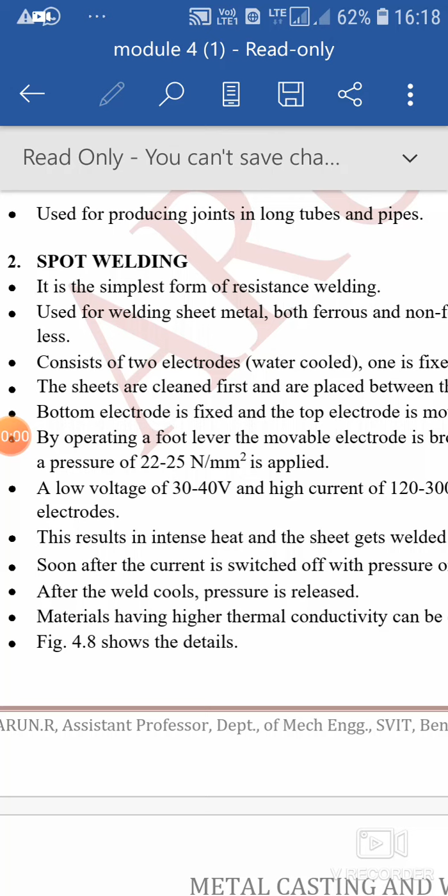Spot welding process is the simplest form of resistance welding used for welding sheet metals of both ferrous and non-ferrous metals of 8 mm thick or less.

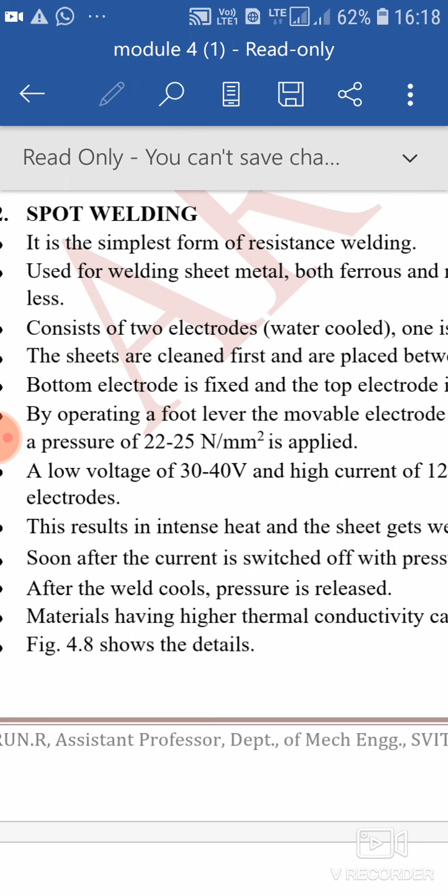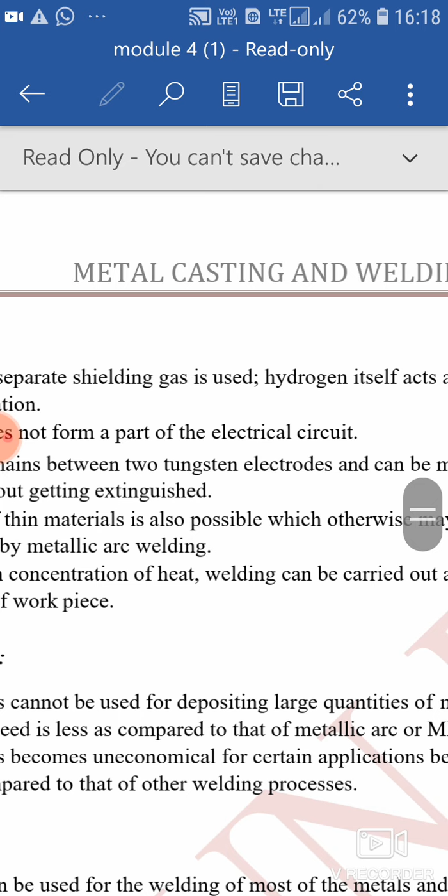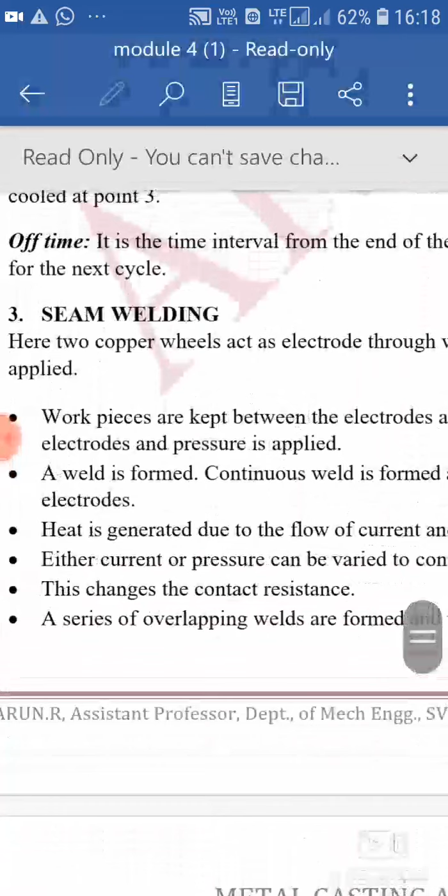It consists of two water-cooled electrodes, one fixed and one movable.

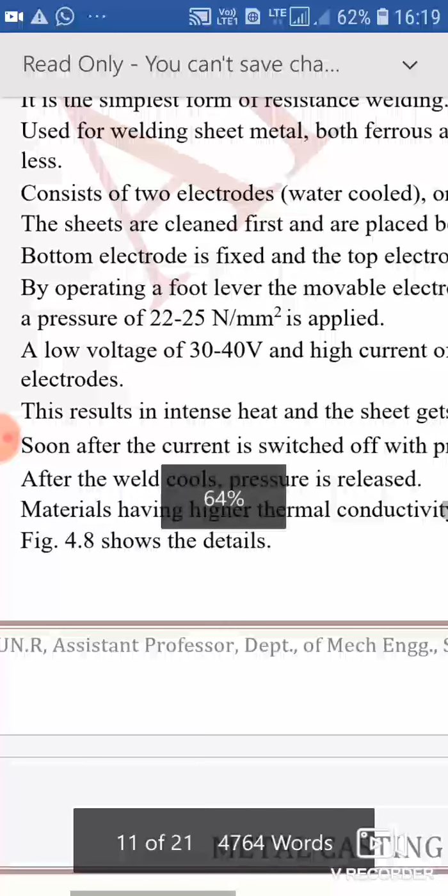By operating a foot lever, the movable electrode is brought in contact with the sheet and a pressure of 22 to 25 newtons per mm square is applied. A low voltage of 30 to 40 volts and high amperage current of 120 to 300 amperes is passed with the help of a transformer into the electrodes.

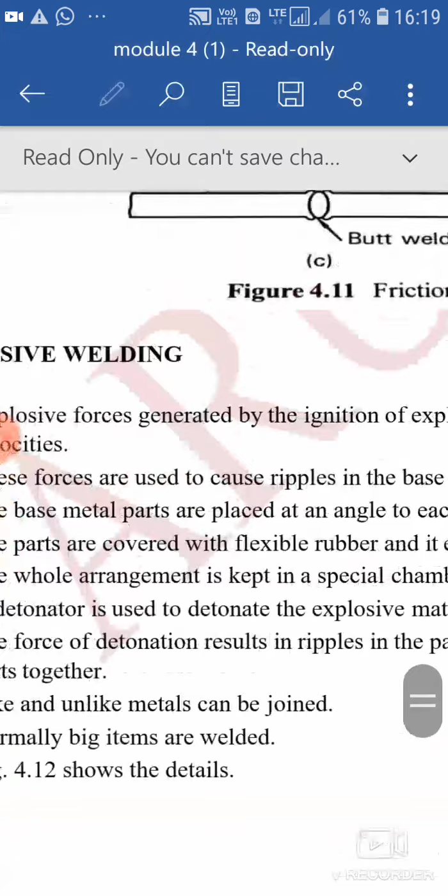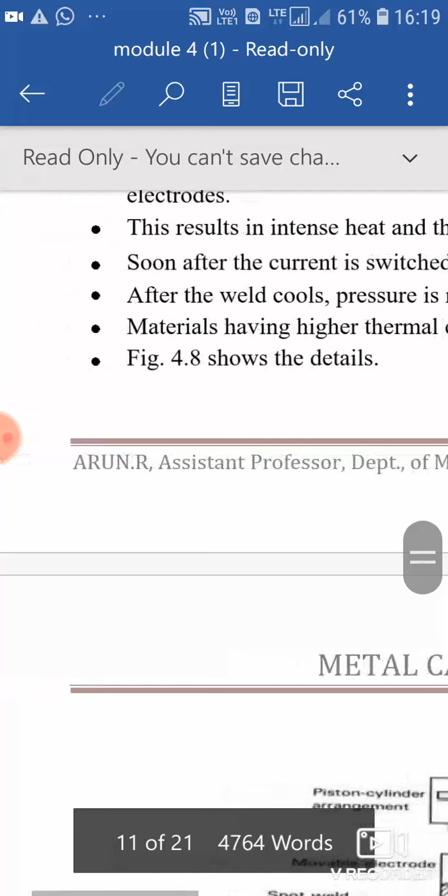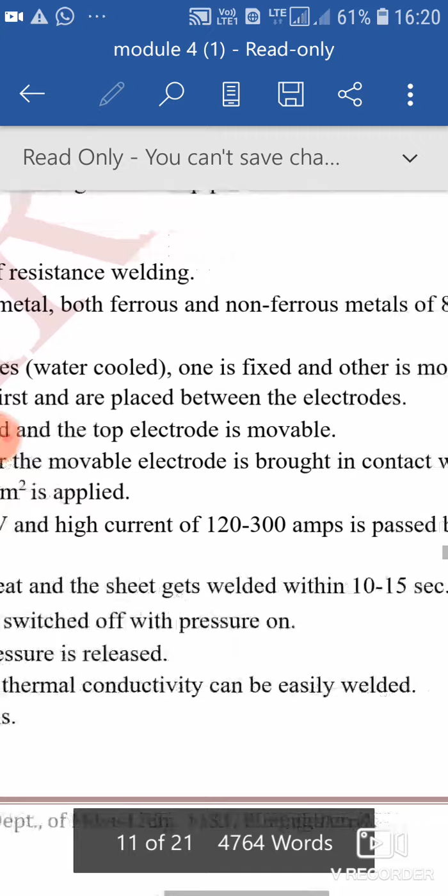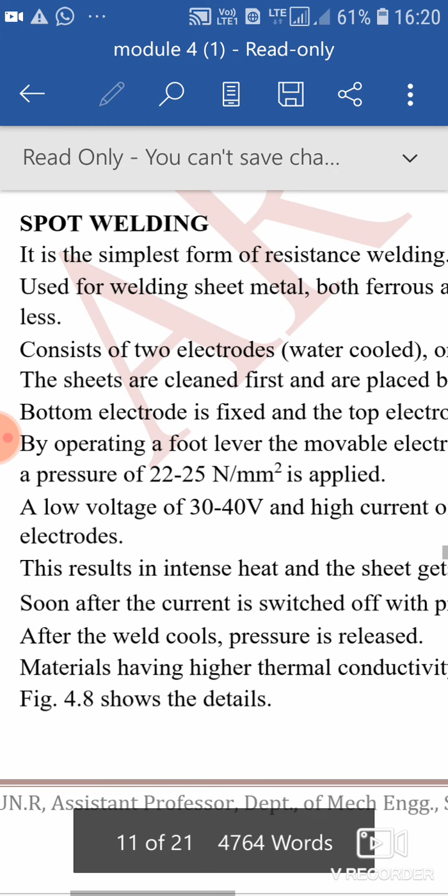This results in intense heat being generated, and the sheet gets welded within 10 to 15 seconds. Soon after, the current is switched off with the pressure still on, and after the weld cools, the pressure is released. Material having higher thermal conductivity can be easily welded.

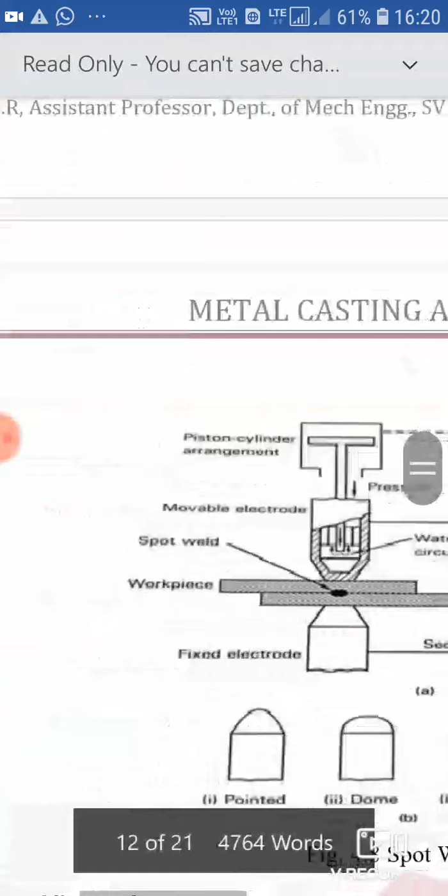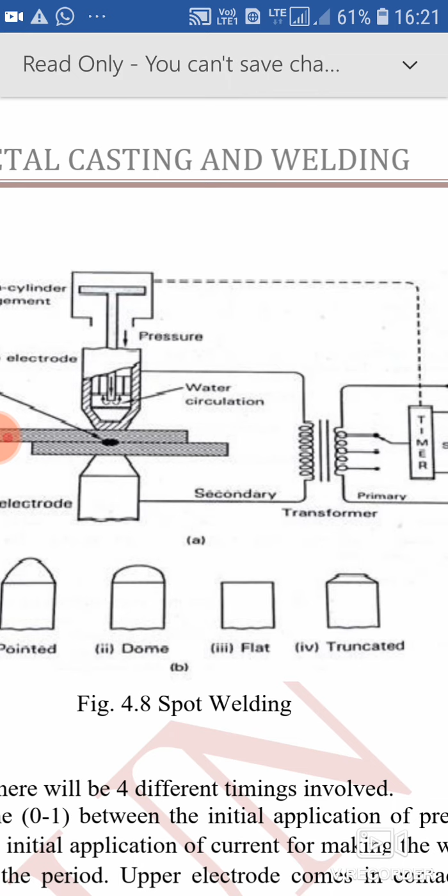Next we will go for the seam welding process. Here two copper wheels act as electrodes through which current is passed and the pressure is applied.

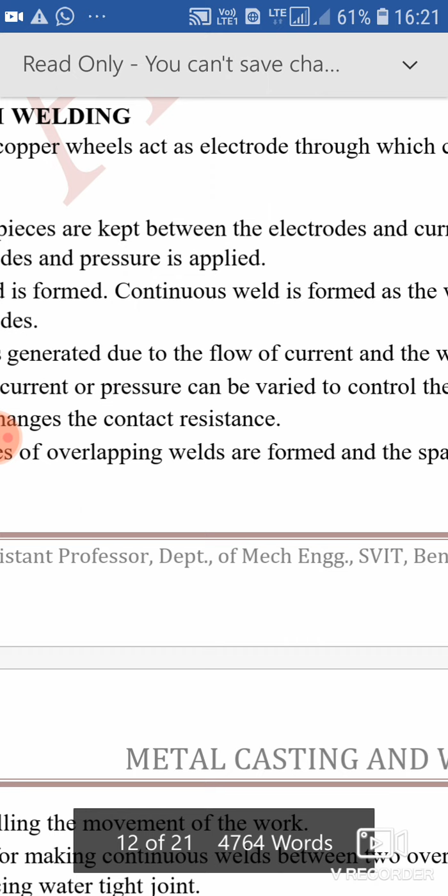The workpiece is kept between the two movable electrodes, and current is passed through the electrodes while pressure is applied. A continuous weld is formed as the work moves between the electrodes.

Heat is generated due to the flow of current and the work offers resistance to this. Either current or pressure can be varied to control the heat generated, which changes the contact resistance. A series of overlapping welds are formed and the spacing can be controlled.

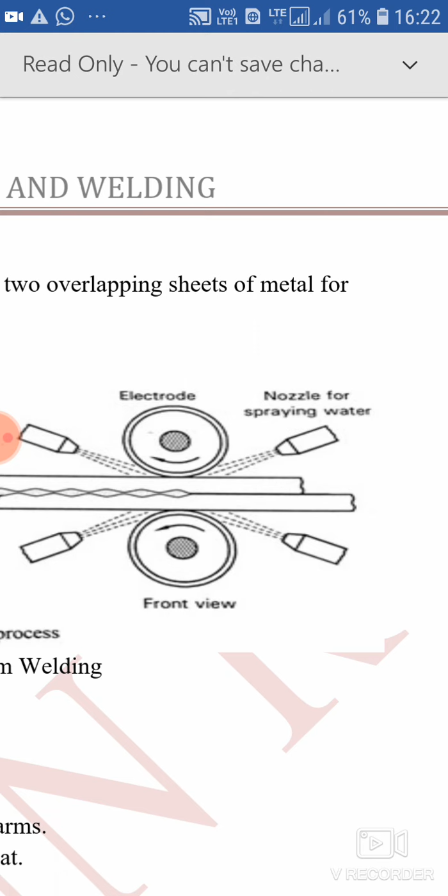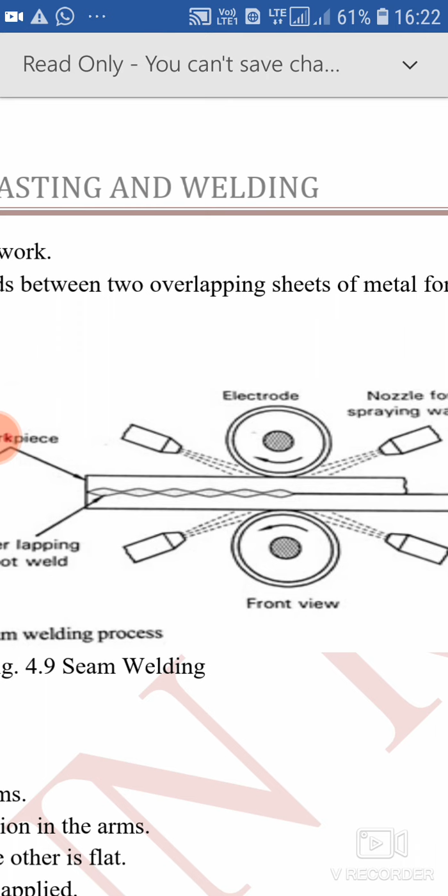You can see here the seam welding process, where the spacing can be controlled and the contact resistance varies continuously. These two electrodes are revolving or rotating in different directions. They are water cooled, and a series of welds are formed, allowing the user to make continuous welding.

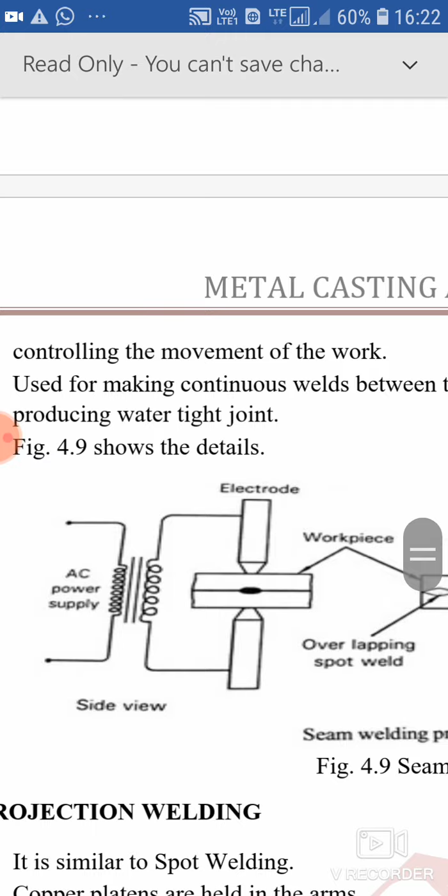Next one, projection welding. It is the simplest of the spot welding process, or it is similar to the spot welding process.

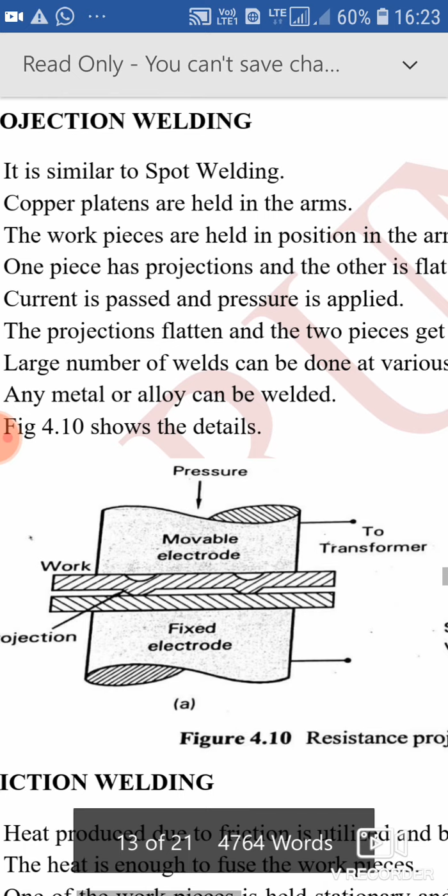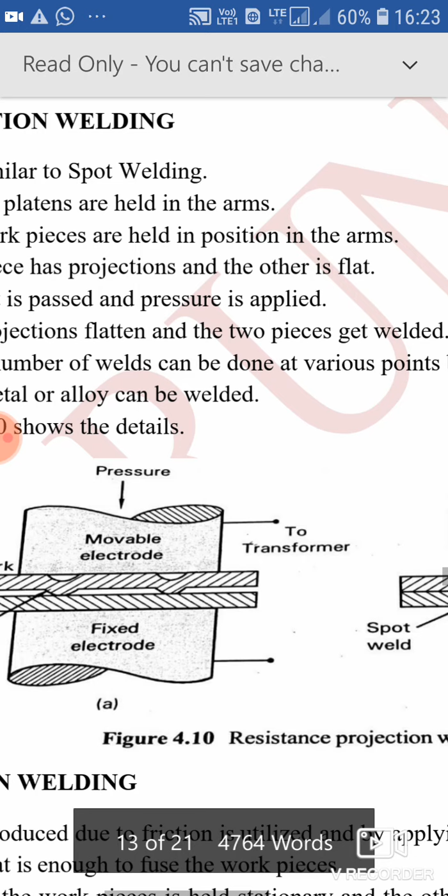The workpieces are held in position in the arms. One piece has projections and the other is flat. Current is passed and pressure is applied. The projections flatten and the two pieces get welded.

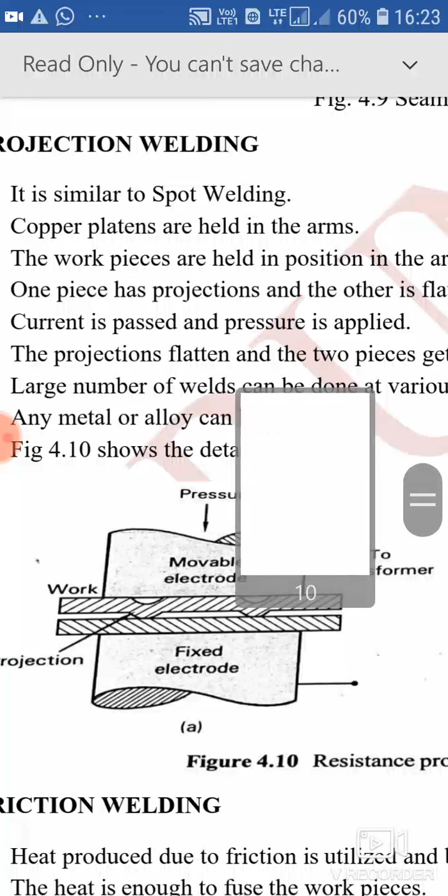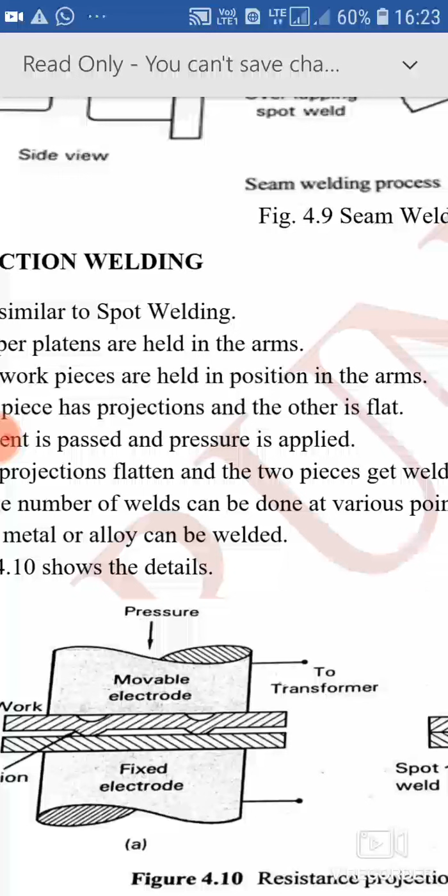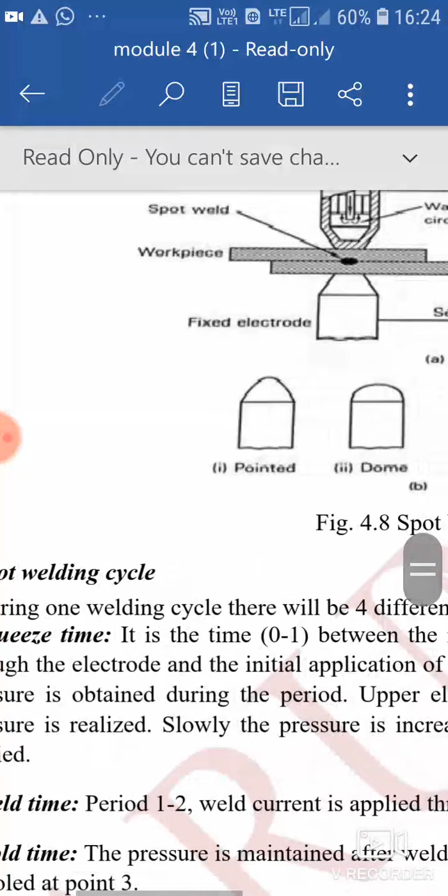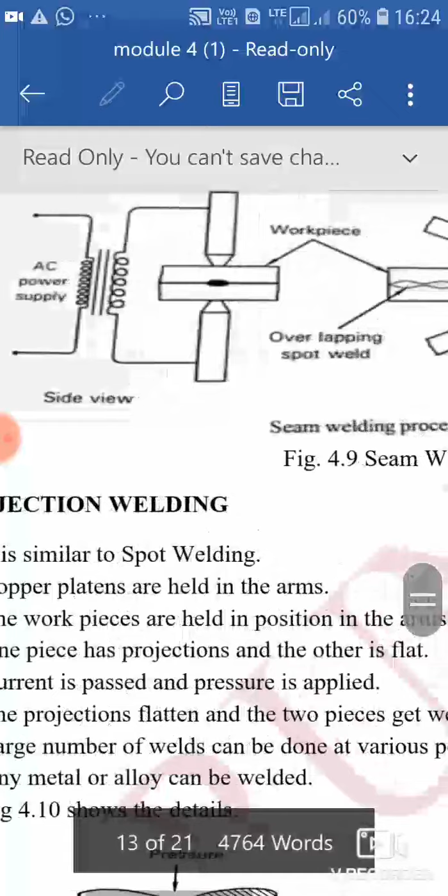A large number of welds can be done at various points by having projections. Any metal or alloy can be welded.

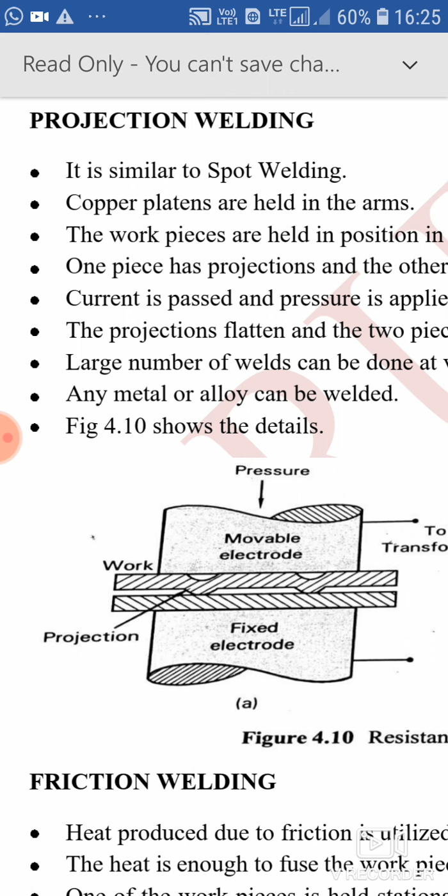The figure shows the details. You can see projections on the upper half plate while the lower half plate doesn't have projections. The movable electrode applies pressure while current flows, and due to the generation of heat at the contact point, you can see a series of spots, here with two spots shown.